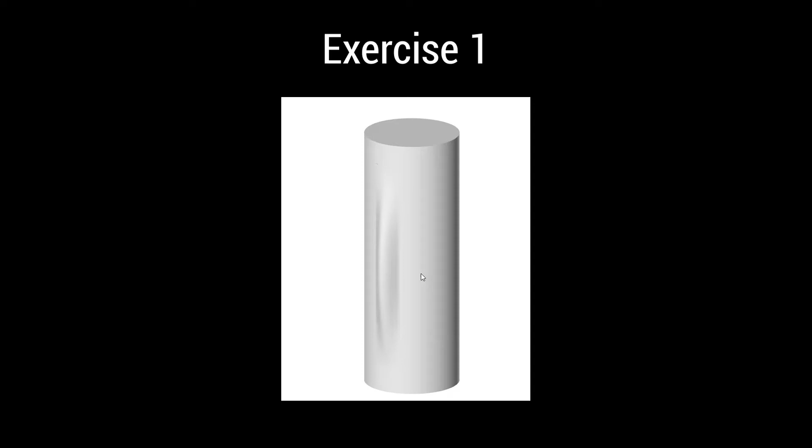So first thing you are going to do is to just create a simple cylinder. You can do it as you want. You can create directly a basic volume. So cylinder, I start from the center as usual. I'm going to make it pretty big, like this, and like this.

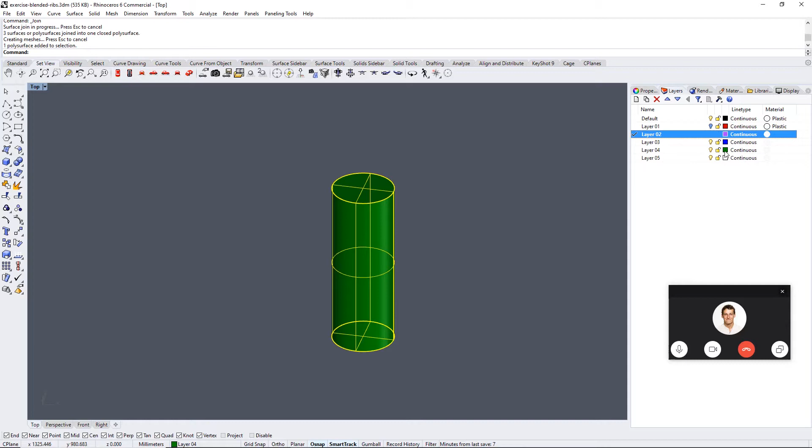Okay, so this one, I'm going to change layer to have different colors. And I'm going just to explode it to transform it from an extrusion to a polysurface and join it again. It's not a nice color, this one. Okay.

Okay, so to do the first shape, I'm just going to first project a line from the center, totally vertical, and project this onto my cylinder by using the Project Curves tool. So like this, now you see that my vertical line was projected all around my cylinder, so also on the top and behind. So we just need the line that is on the front.

So we are going to explode this rectangle and select the first edge that we want to keep by pressing Control or Command and click. Okay, and like this, I have just the three behind selected, and I can delete them with the delete key.

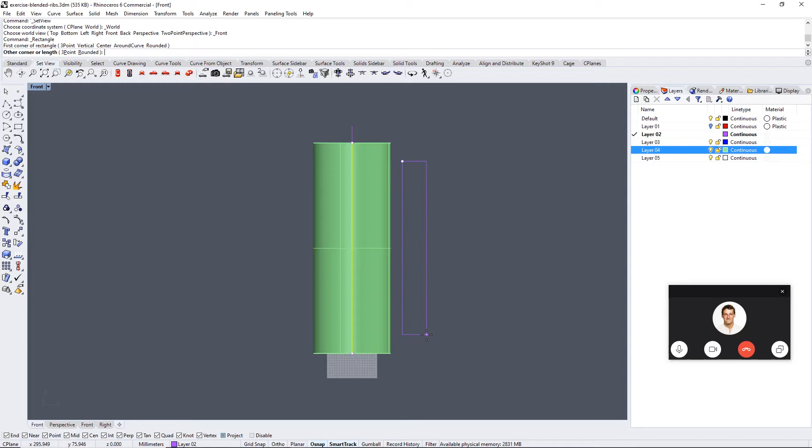So I have this one. I don't forget to click on Project to draw a rectangle, which is going to be the cut I'm going to make inside the cylinder. So something like this. Okay, so I'm just switching in wireframe render to be able to place it in the middle of the vertical line.

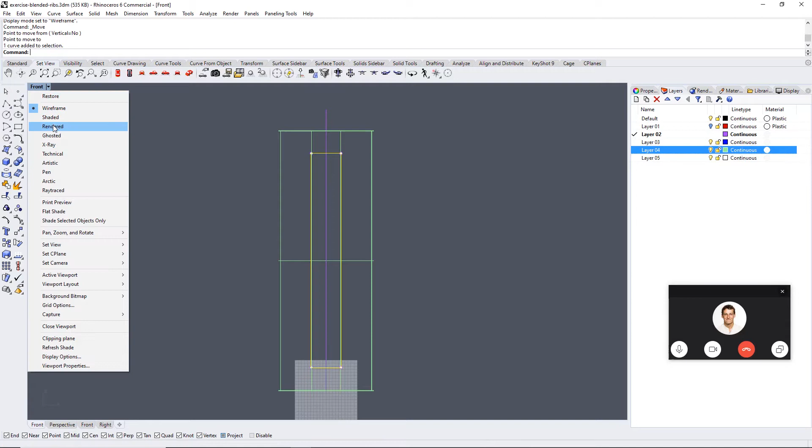Okay, and same thing, I'm going to project this rectangle on the cylinder. So I use again Project Curves, and like this I have two rectangles, one in the front, one behind. We don't need the one behind, so I unselect the one in the front and delete the one behind. Okay.

So we can do the cut right now. I'm going to cut my cylinder with the rectangle I projected on it. If the curve is already on the surface, you can cut something in a perspective view. But if it's not on the surface, if I wanted to cut it with the rectangle which was in the middle, don't forget that you have to be in a plan view for Rhino to be able to understand in which direction it has to cut your surface.

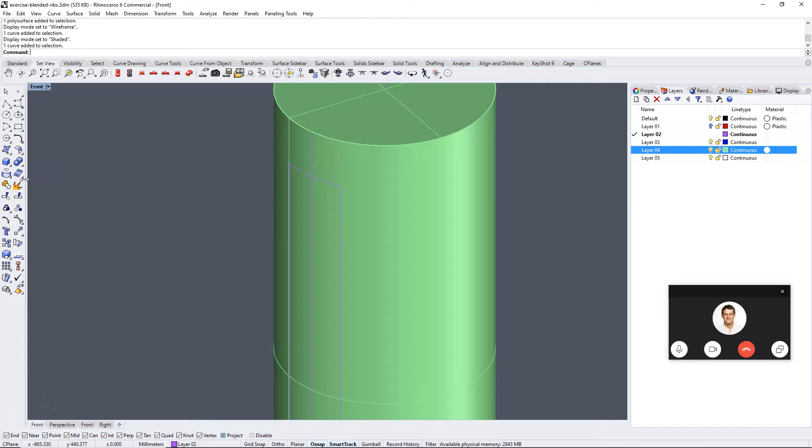But here, I know that this rectangle is projected on the cylinder, so I can cut it even in a perspective view because it knows where the rectangle is. So I use the Split tool, I select the cylinder, I validate, and the rectangle, I validate. So we have this little surface that we don't need anymore. So I delete just the surface.

I remind you that you can undo a cut if you made a mistake by using the Untrim tool. On the Trim tool, you see that with the left click, this is Trim. With the right click, this is Untrim. So I do a right click, I select the cut edge, and you go back to your original surface. Okay, so I undo that, Control Z or Command Z.

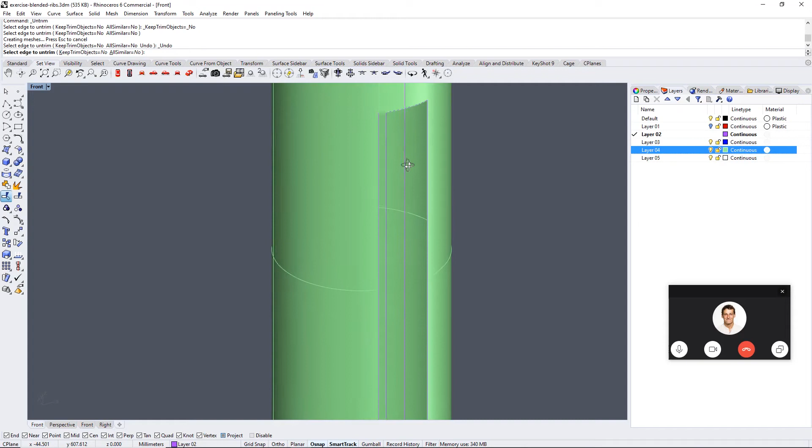And now I want just the beginning of this line and the end of this line, and that it stops at the beginning of my cut. Like this, I'm going to sketch a new curve, but it has to be tangent at the beginning and tangent at the end for the new surface to be totally blended in the existing surface. So I'm going to cut my vertical line that I projected on the cylinder with the rectangle I projected also on the cylinder.

So my line is selected. I use the Split tool. What is the cutting object? It's my rectangle, and I validate. And like this, now you see that my line is cut. I can delete this one. Next step is to sketch my new line between these two pieces.

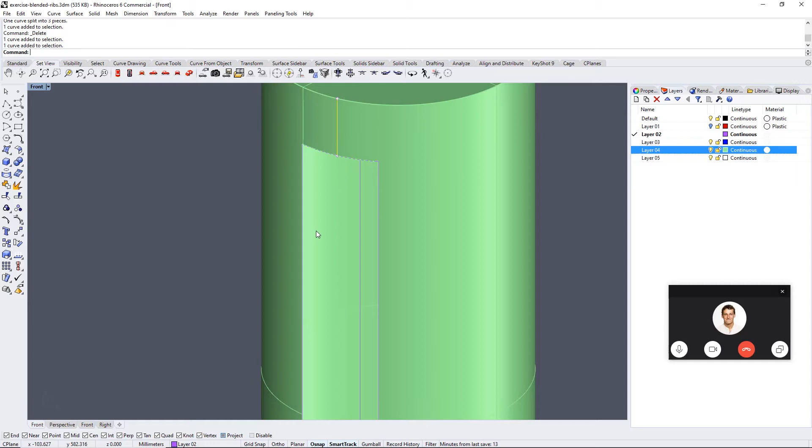So why do I keep these two pieces? For two things. Like this, I know where my curve has to start. And since I know it's totally vertical, I'm going to be able to make a tangent curve. So it will start in tangency with this little piece of curve, and it will end also in tangency with this little piece of curve. Like this, we are sure that our new surface will be totally blended.

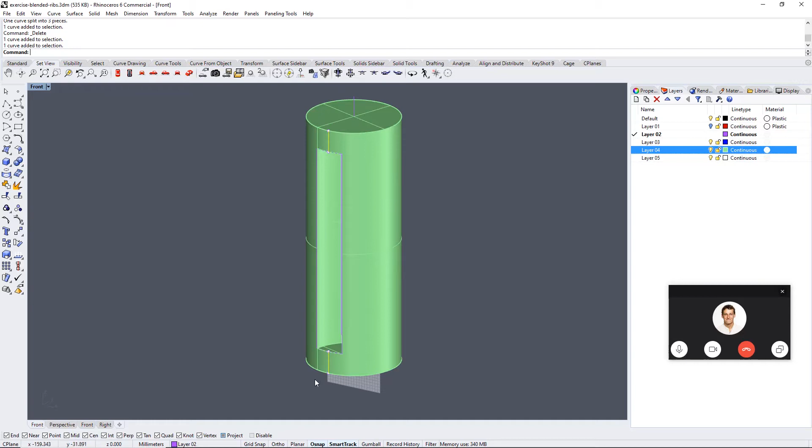So I'm just going to keep these two little pieces in view. So I go in Visibility and Isolate Object. Like that, I have just my two little pieces. Set view in profile view or front view. Profile view. And I'm going to sketch a new line. So I'm just going to use the Control Point Curve.

So of course you use the tool you want, but you have to make something tangent at the start and at the end. Don't forget that if you want to have something totally blended. How do you make something tangent with the control point curve?

For example, I start in the middle. You see that if I click one point and then click another point on top, the start of my line, compared to a virtual horizontal line, if I sketch a horizontal line, there is no tangency.

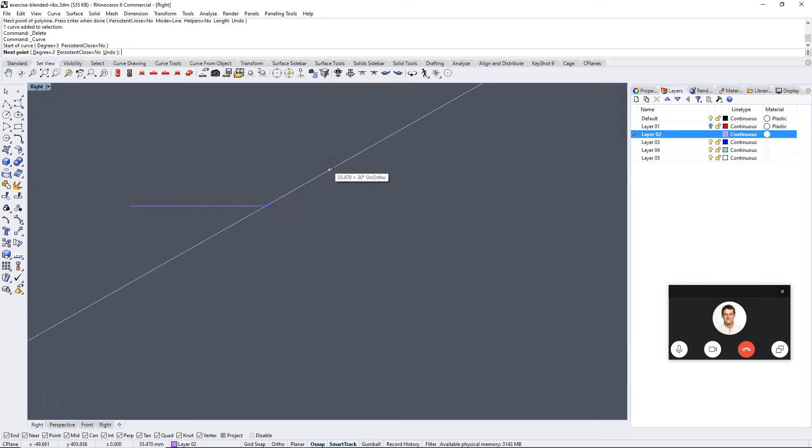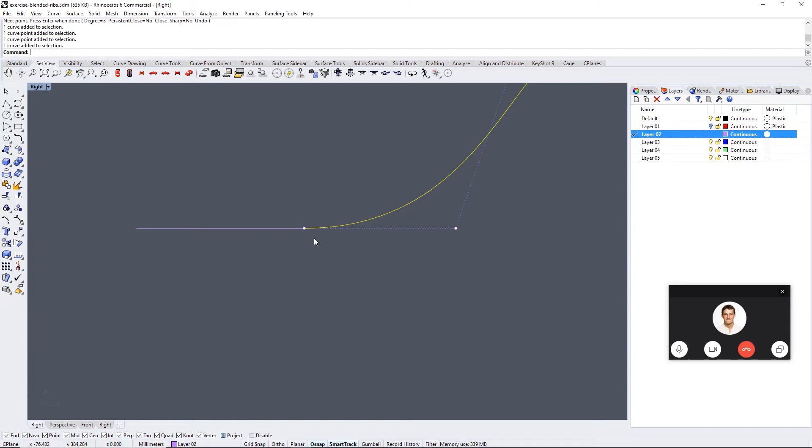How to have tangency with a curve like this? So I start again the control point curve right here. You have to have at least 2 points horizontal, and when you continue your curve and end it, knowing these 2 points are in the continuity of your existing line, will assure you tangency at the beginning of your curve.

Okay, so always at least 2 points for your curve. So that's what we are going to do with our two little pieces right here.

So I start my curve, right here. So at least 1 point vertically to be sure that my curve will be tangent to the existing line, at least 1 point, and then you can sketch whatever you want. So I do something like this, and I go back to something.

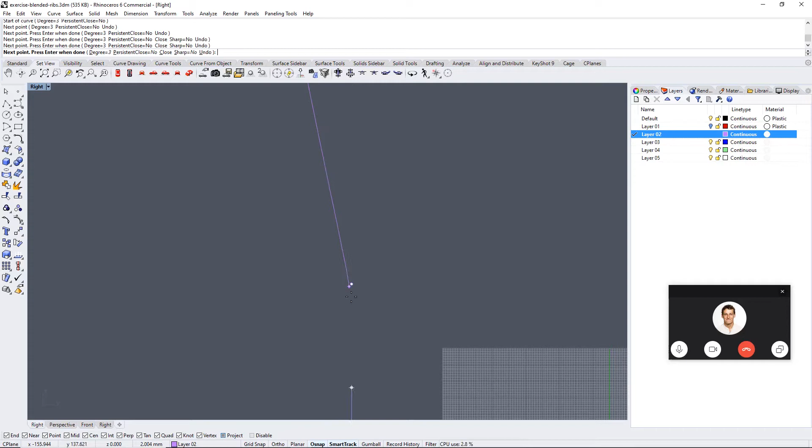So 2 points, at least 1 point in the continuity of my end of curve, and the last point here. And here I know that it's tangent. Then you can move these points if you are not sure, but don't forget that if you move this one, you lose the tangency.

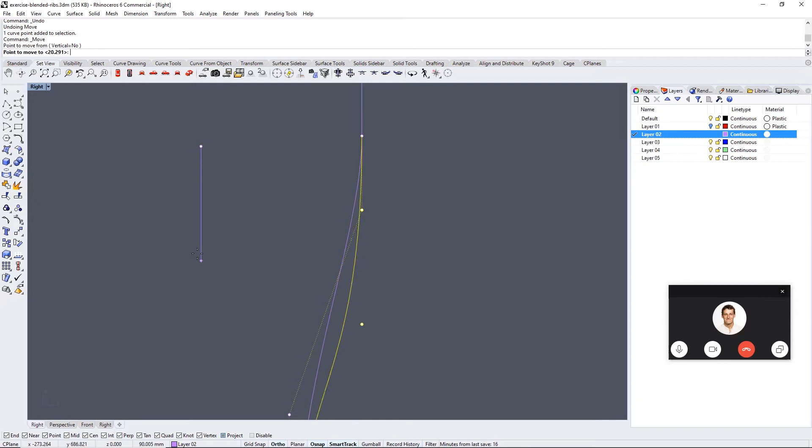You really have to have at least 2 points in the continuity of your existing line. Of course, you can still move it vertically, you won't lose the tangency as long as they are aligned with the existing line. So something like this, just going to move them a bit more like this.

So I remind you that if the control points are not activated when you select the curve, you have to activate them by clicking on the tool Show Object Control Point. And if you want to deactivate them, you right-click on the same tool.

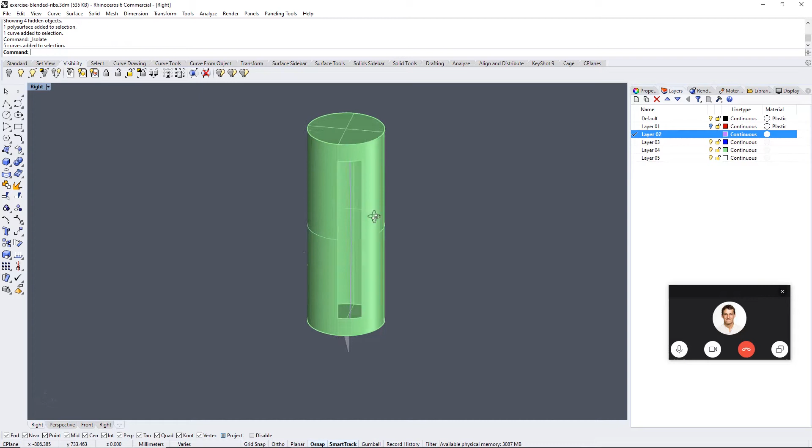So for visibility, I show everything, and we have everything we need. So we are just going to need the cylinder and the curve. I just isolate this object to keep just this, and we are going to use the edges as curves to create our surface.

And for this, we are going to use the sweep 2 rails. So I go in the surface sidebar and use the sweep 2 rails.

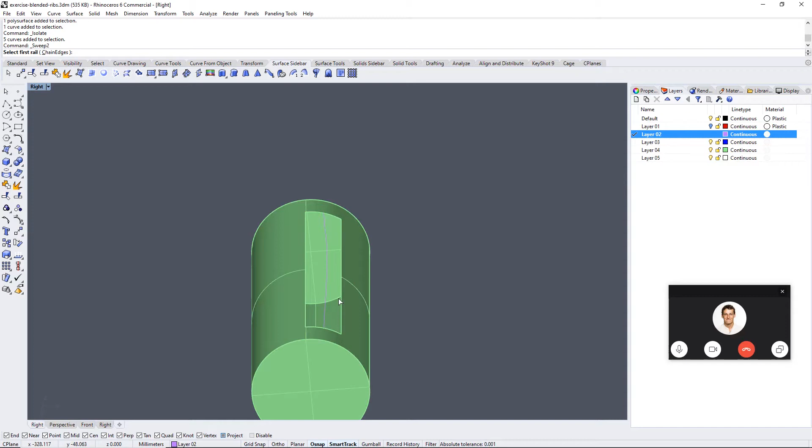So I remind you also that you can choose the kind of junction between the existing surface and the one you are creating just with the rail position. So you will be able to set that you want tangency in the rail position. It's not... you still will have some tangency on the section because it's an edge from the cylinder.

So normally there is no... I'm searching my words. If you choose the rail with the little section or the rail with the long section, I think in this case there won't be any difference. We can try both to see if there is a difference.

So auto chain, yes. First rail, it's the little edge. Second rail, I forgot to validate. Validate second rail, this little one. I validate, and then the section: edge of the cut, my new curve, edge of the cut. You validate, and you have a preview of it.

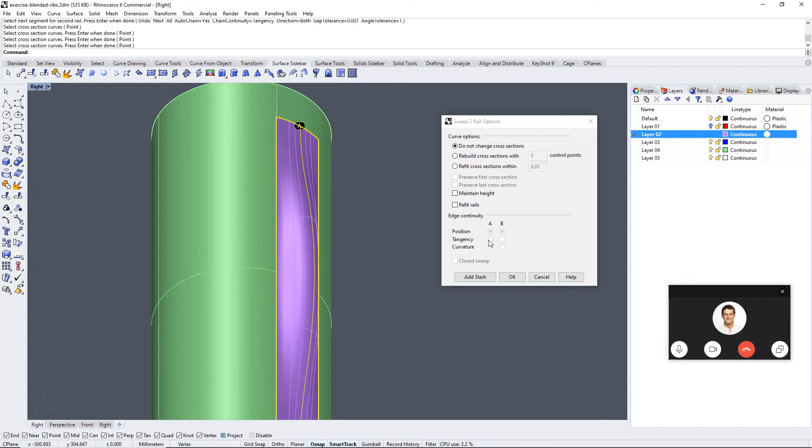And that's pretty nice. I don't know why we can't choose this. Well, I click on OK to validate.

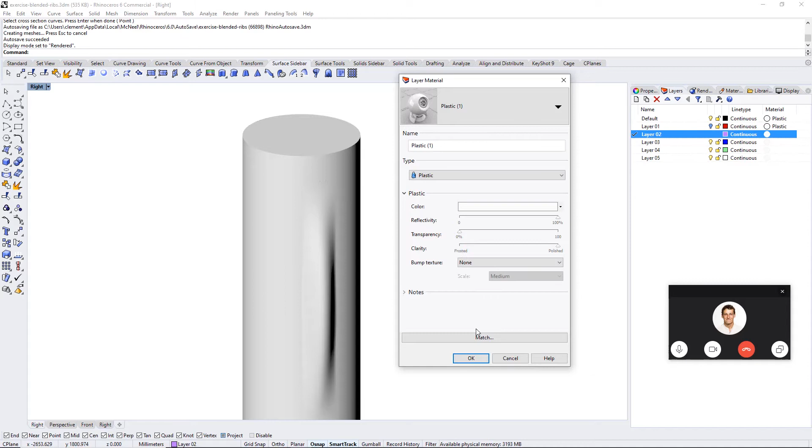And if I go into the render preview, I have to add some kind of plastic material with some reflectivity at 100%. Like this, I have some reflection, and you see that we have, and also for this one, change object layer, and you see that we have a totally blended surface, no edge at all.

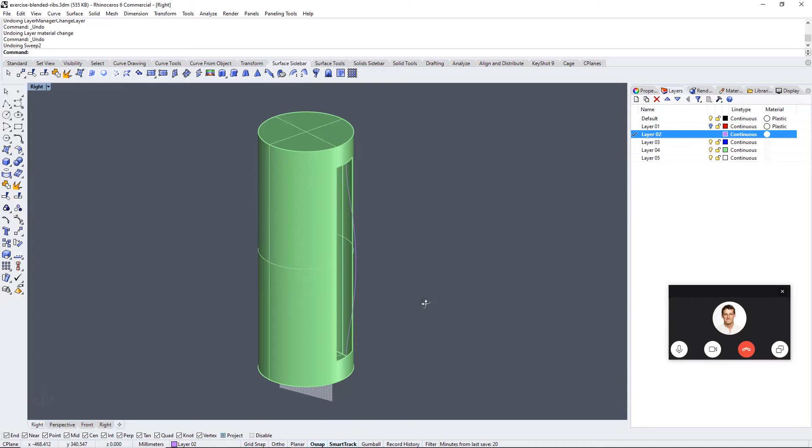Okay, one little trick before I let you do this one. So I go back in the shaded view, I undo this. Remember that you have a little history record in Rhino. So if you are not sure of this curve, instead of changing the curve and redoing again the shape of the surface, the Sweep 2 Rails, you can record the history.

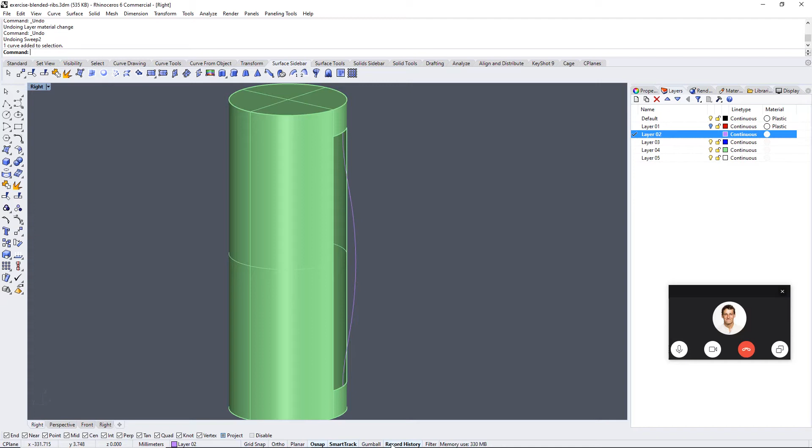Okay, so the tool is at the very bottom of your screen, record history, just near the magnet tool. You click on Record History. Now it's in bold font, so it's recording the history. You go to pick your Sweep 2 Rails, chain edges, okay. First rail, you validate. Second rail, you validate. Section first edge, curve, second edge. You validate, and you click on OK.

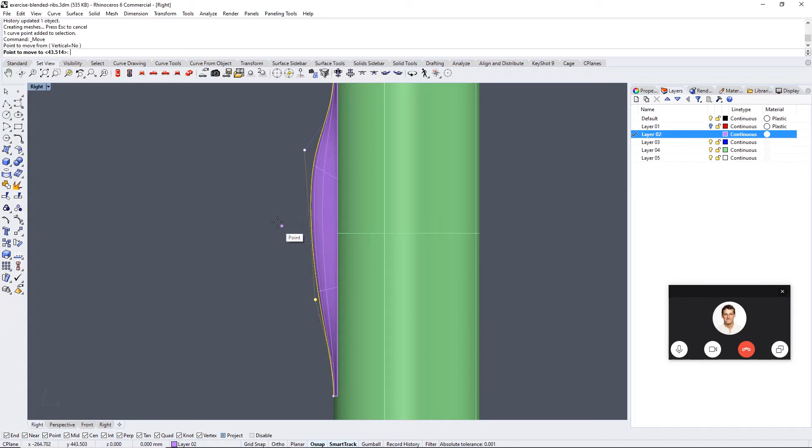Now you see that the record history is unactivated, but I still have my curve here. So I go in the side view, and if I move some point of my curve, you see that the surface is moving too, because Rhino recorded the last function. So like this, you can still make some changes in your curve without doing again your Sweep 2 Rails.

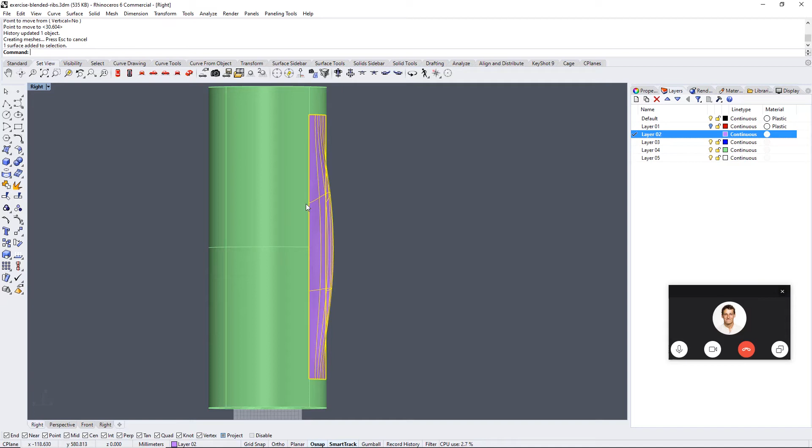But as soon as you are going to create a new function, a new command with this surface, for example, now I want to join these two surfaces. You see that it's not in the same layer, so I join them. I have the little warning saying that the join command will break the history of the two objects. Are you sure you want to do that? Okay, so I said yes.

So now if I change the curve, it won't change anymore my surface. Okay, I let you do that.

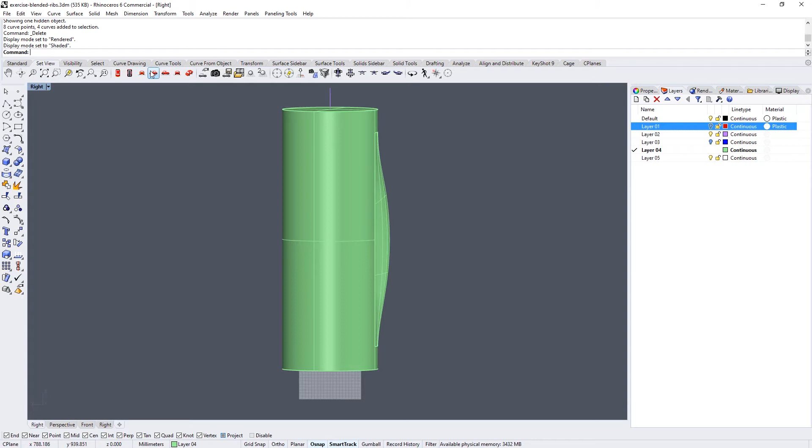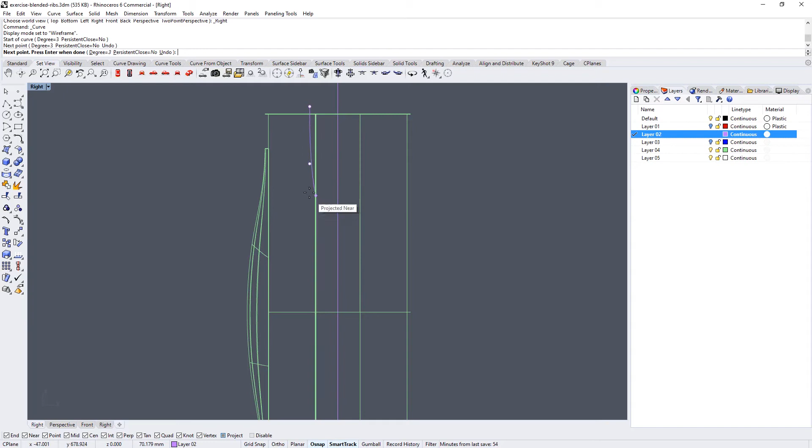And I'm going to sketch my line. So I go in side view. I'm still going to use the control point curve. I prefer to go in wireframe. Okay, and like this. Okay, so I sketch a line. So here I want really the start to be totally a straight line.

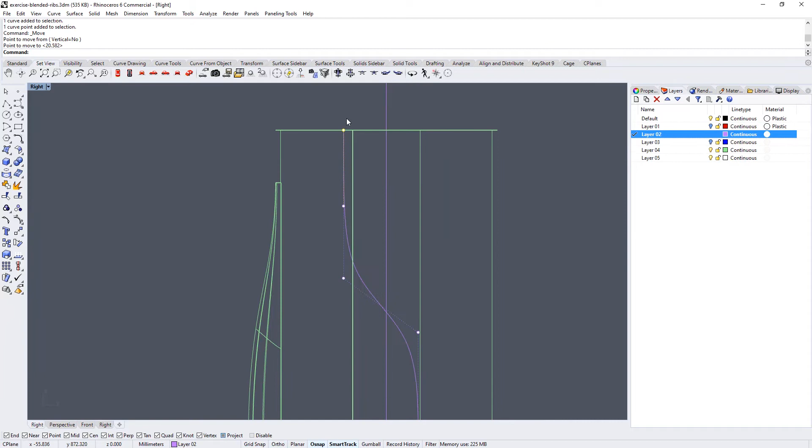So I'm going to create 3 vertical points. Then like this. 1, 2, 3, and another 1, 2, 3. Okay, so I have this kind of line. So you are not obliged to do exactly the same shape. Okay, you do the shape you want. It's nice to start from a totally vertical line like this.

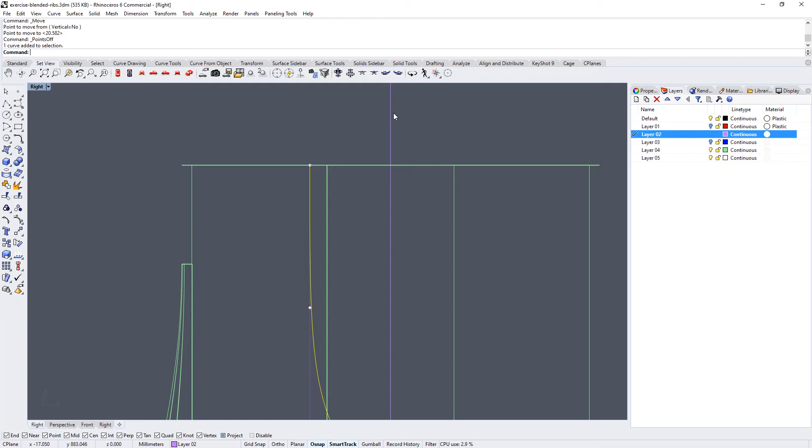When you do the offset, it will start also at the very top of the cylinder. Otherwise, if the start is not totally vertical, you will see that the offset is going a bit out of the cylinder, which is not bad, but for the example, I prefer it to be totally vertical.

So I go in the curve tool, choose the offset curve, and create my offset. So maybe it's not enough big. I'm going to click on through points because here it's waiting a distance, but you can click on through points, and like this, it's where you click that it will do the offset. So something like this. Okay, something like this. So now I have my 2 lines.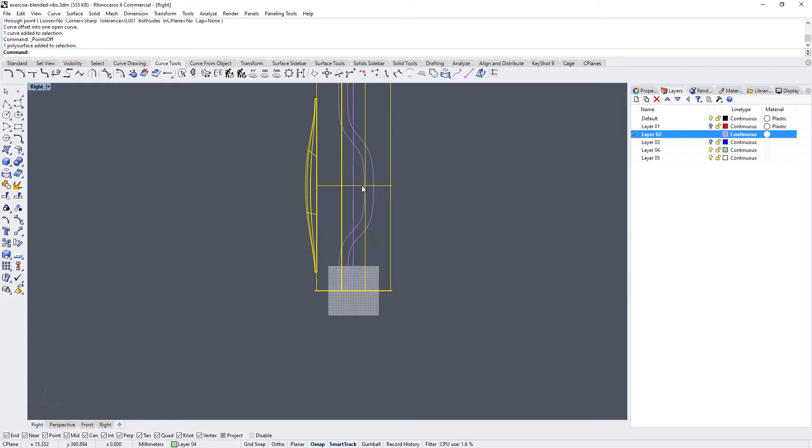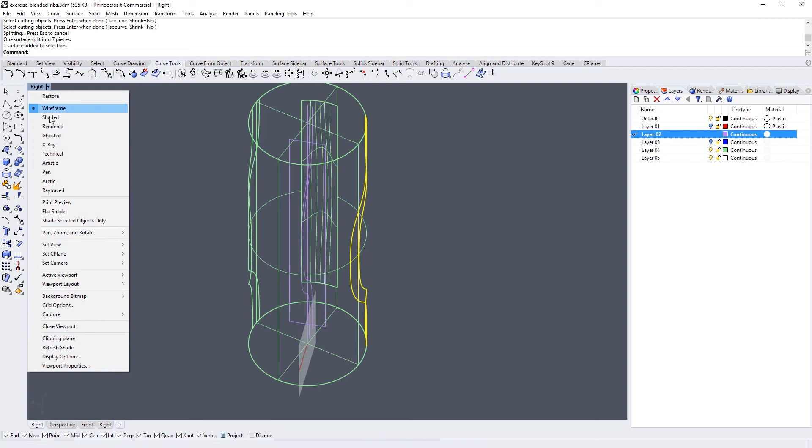So I'm going to cut my cylinder. So first I explode it to cut just the side of the cylinder. I choose split, my 2 curves, I validate, and now, so my cylinder, you see it's cut both sides because I was in plan view, so it cut through the surface. So I have these 2 cuts that I can delete.

Okay, and now I'm going to change the shape of a part of the cylinder. So maybe I can use this one. So I'm going to join these two pieces together, otherwise the cage will make a difference between the edges.

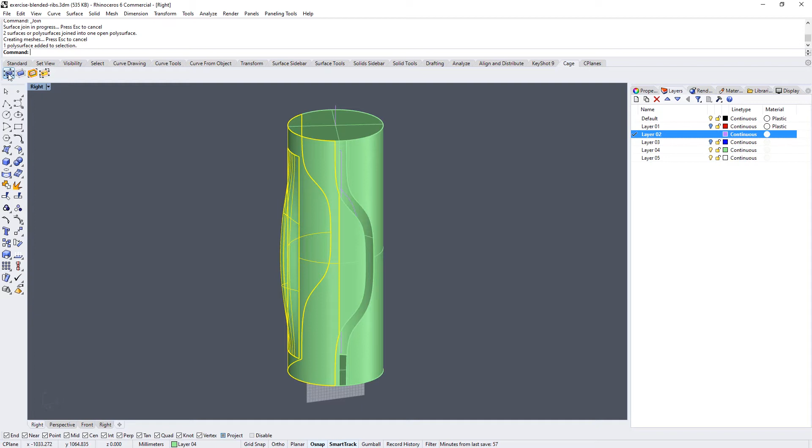And I'm going to create a cage. So cage edit to create a cage automatically around the shape you selected. So cage edit. Then you just have to click on the first options. So bounding box, C-plane, and the important part is the number of points. So here I'm going to create a cage 4x4x6.

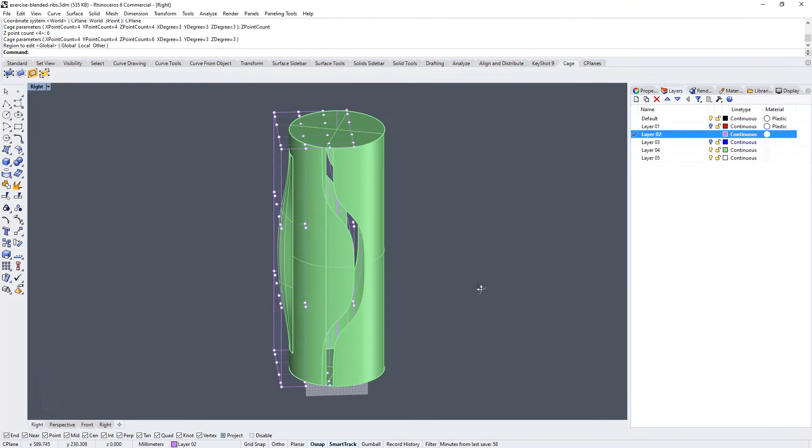Validate. I have to activate the points to see something. Okay. So of course the 6 points are not in the good direction. I want the 6 points in the vertical direction. So I'm going to undo this.

Oops. Bounding box, C-plane, Z point. Yesterday I made 6 points in the Z, it was working. I'm going to make 6 in the Y.

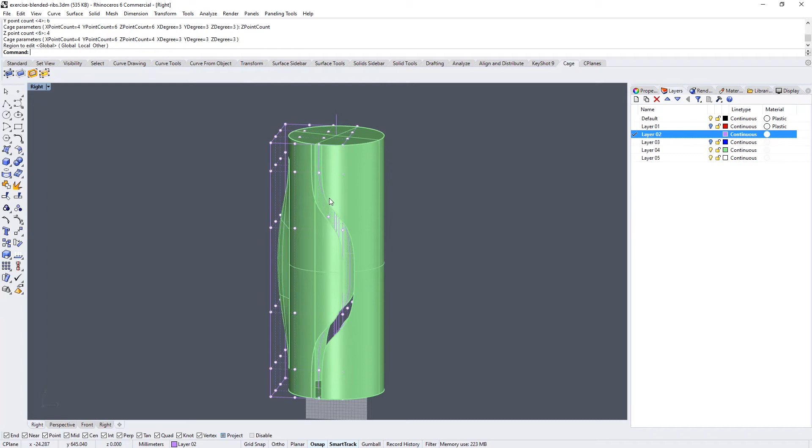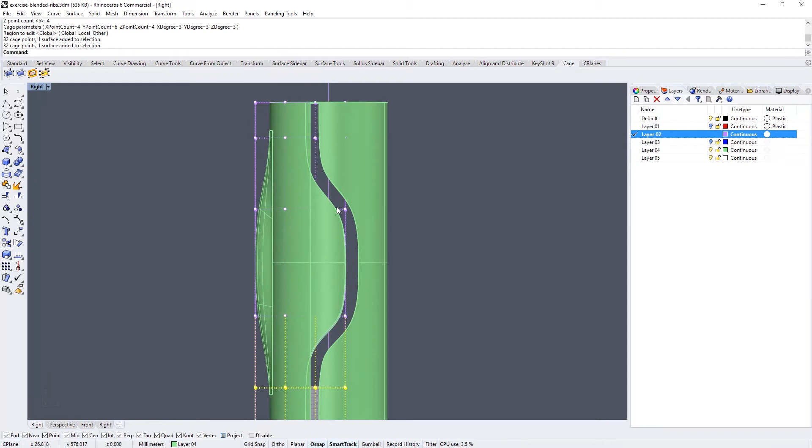Okay, so now I have the 6 points vertically, so I put the 6 points in the Y axis. I want to change the shape, but just in the middle. That's why I put 6 points vertically. I'll keep the two first rows and the two last rows unchanged, so I keep exactly the same shape at the beginning and end of my cylinder. I'm just going to change the shape with the two rows in the middle.

So I select the wireframe view, like this I see better, and side view, and I'm going to change the shape of these points. So you see I select the two rows in the middle and the two columns on the right, these 4 points.

So I select them, then I go into top view and use my scale tool, scale 1D, from the center of my cylinder. I wrote W0, I validate. Endpoint, we don't really care here because we're not working with exact measurement. So I click just a bit outside of the cylinder and go vertically or horizontally on the side, something like this, it's enough.

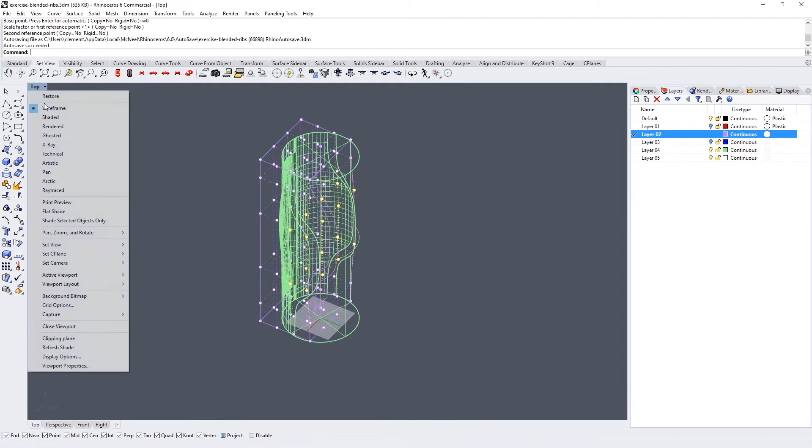I think I forgot a piece, so be careful that everything is well joined. You see here I had a piece after my cut that was unattached to the rest of the surface, so I joined them. Here I have 2 little pieces that I don't need, so I can delete them.

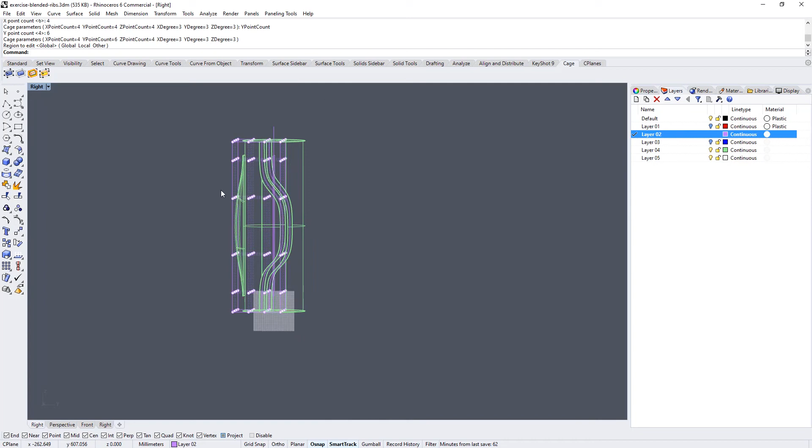Okay, I have the 6 points vertically. So set view, side view, I select the 4 points here on the side. I go in the top view and do a one direction scale from W0, and I stretch it a bit on the sides.

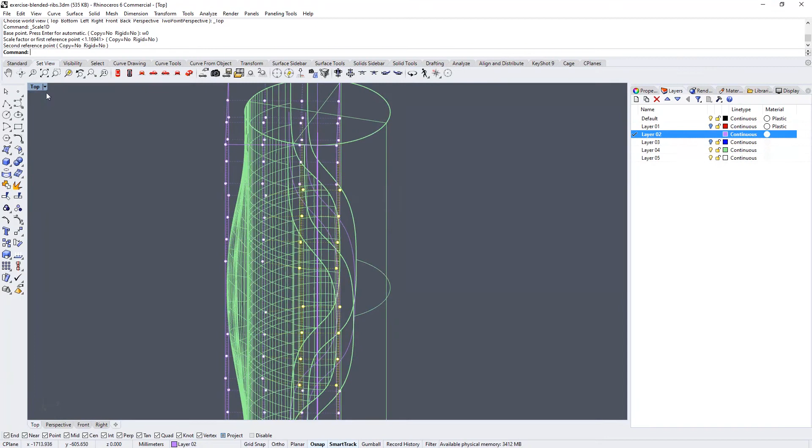Okay, so I go back in the shaded view. The cage, I don't really need it anymore. And now I can make the blend surface between the two halves of my cylinder.

So I go in Surface Tools, Blend Surface. Before clicking anywhere, don't forget to click on Chain Edges, Auto Chain yes, Continuity on Tangency. First edge, you validate. Second edge, you validate. And here is your blended surface.

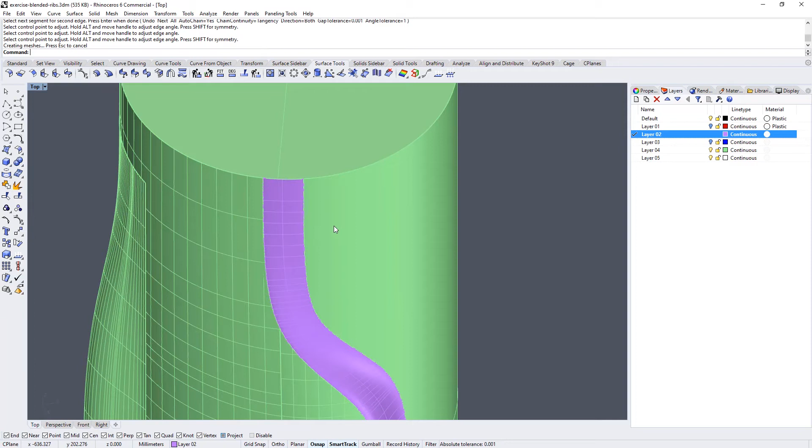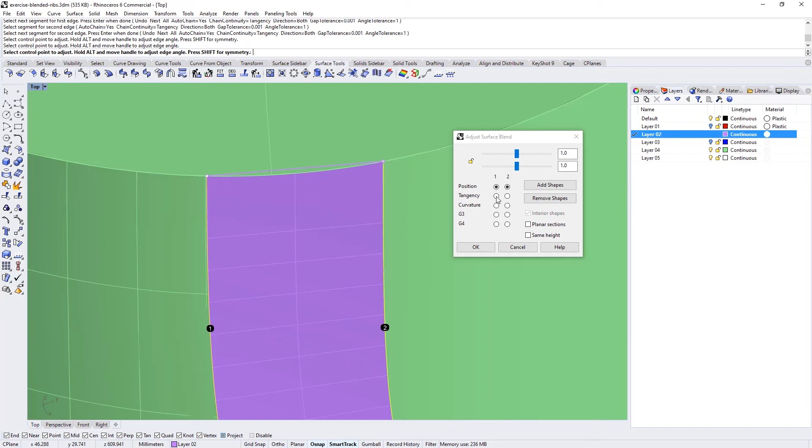So here you see I'm in curvature mode. Maybe it's not useful here, so just tangency will be enough. If you want straight, sharp edges, you can choose some position. Like this you will have really sharp edges, but at the top you will lose the curve of the cylinder. So here, tangency.

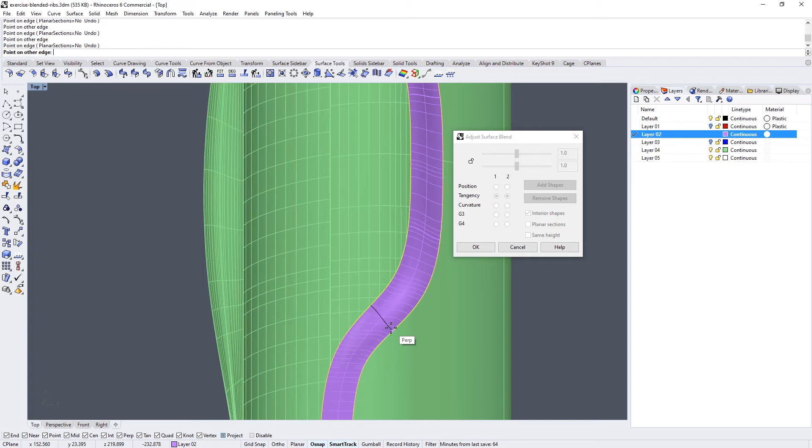Okay, what I can do is add some shapes. For example, here, try to always look at the perpendicular magnet, you click on it. So I'm going to add a few more like this to have a cleaner surface. Perpendicular, perp, and perp.

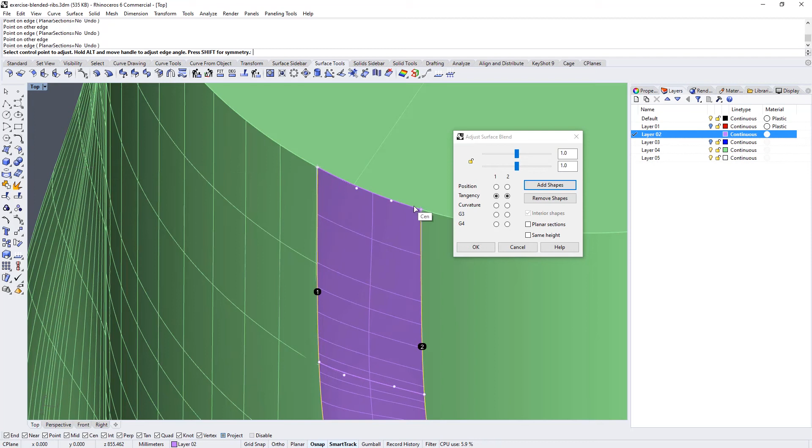When you're finished adding your shapes, you validate, and now you can manually change the degree of tangency on each handle. So here you cannot move it like this, it has a curve which is really similar to the side of the circle. But the other one, you can move them if you want a more sharp edge in your blending surface.

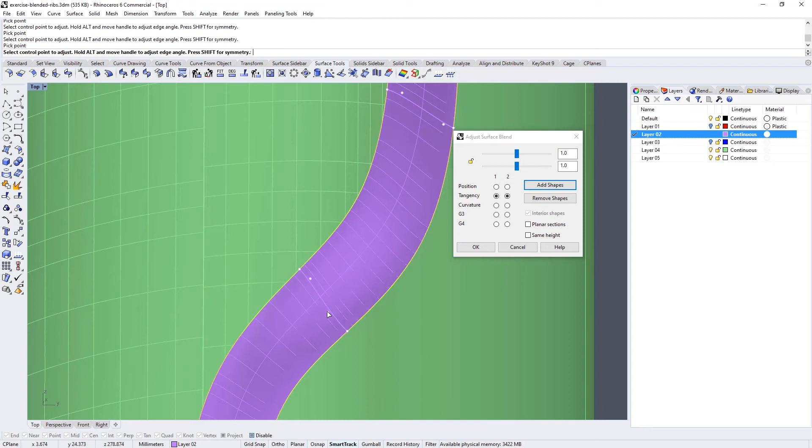When you do that, maybe disable all the magnet points, because otherwise it will magnet everywhere and it's disturbing what you're doing. Okay, so you can just change the little handle, and you just have to validate at the end.

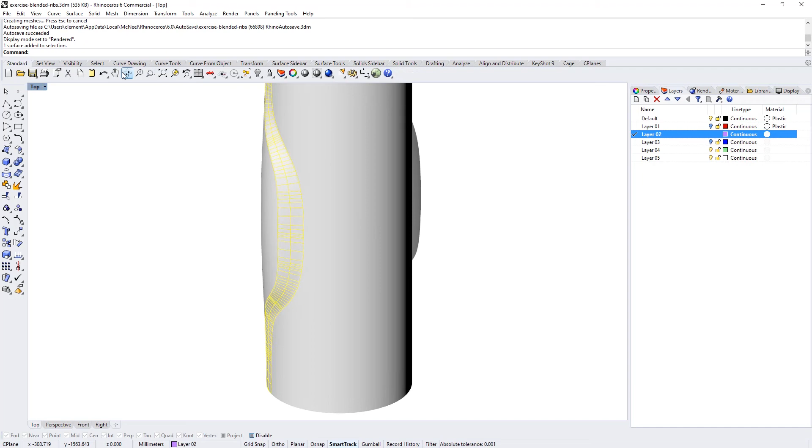And if I go in render view, I have something like this, which is totally blended. And if you worked well in symmetry with the cage and with your cuts, if you go in top view and create mirror with the mirror tool from the center of your scene, you don't have to make a second one, because the first one will fit perfectly on the other side. So then you can join everything.

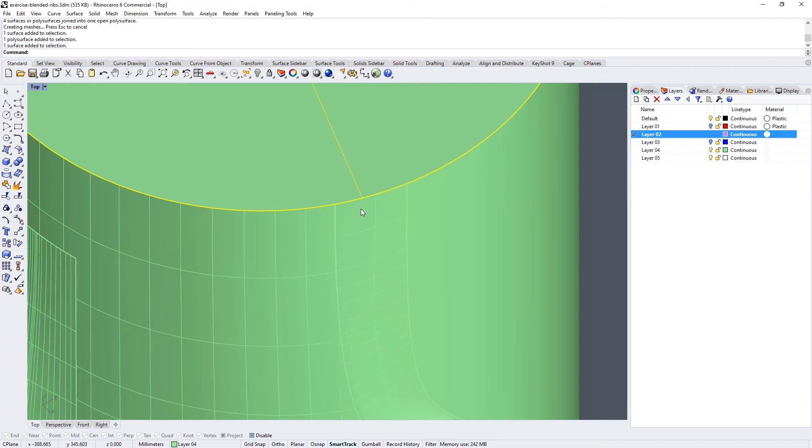Okay. The only thing is, I think this edge won't fit perfectly onto your cylinder. So in general, what I do is the blend surface, and then I just cut like this.

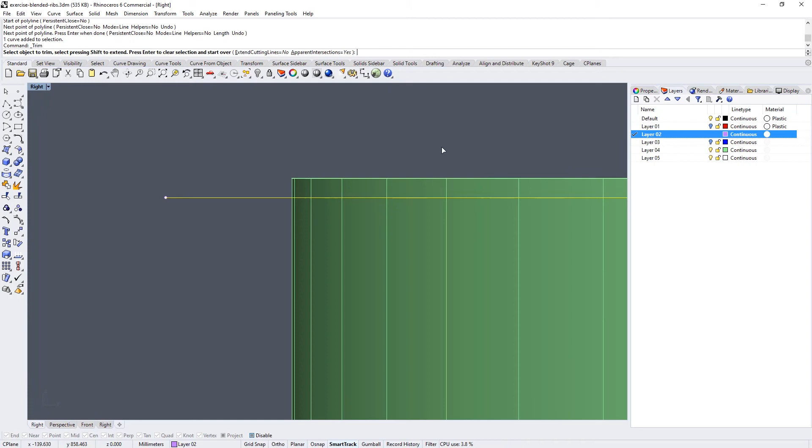So I go in this view, I create a sideline, you cut all the part that you don't need, and you redo the cap. Like this, you know that it's perfectly fitting and blended.

And you go into the tools you know, solid tools, cap planar holes, and there is a new cap on the top. You do the same at the bottom, because otherwise I think the edge of your blending surface and the cap of the cylinder won't join perfectly. Okay, your turn.

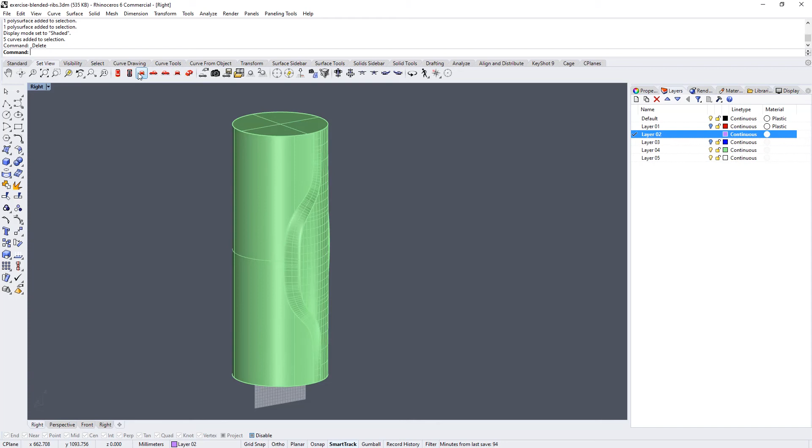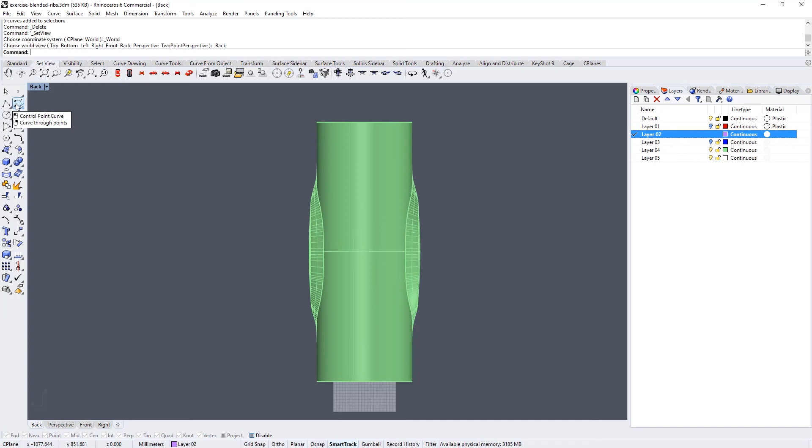So set view, back view. Okay, so here it's the same start. We are going to sketch one curve through our cylinder, and we are going to create an offset of it. So same tool, control point curve. So I'm just going into wireframe to see better through my cylinder. So I unchecked visible because I checked it a bit earlier.

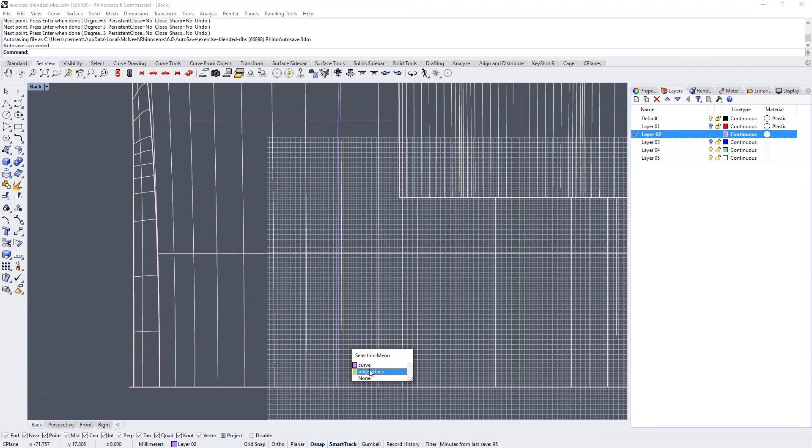So 1, 2, 3 points. Okay, and then I'm just going to create this line. This 1, 2, and 3. Okay, so I have my line. I'm going to create the offset curve. Okay, something like this.

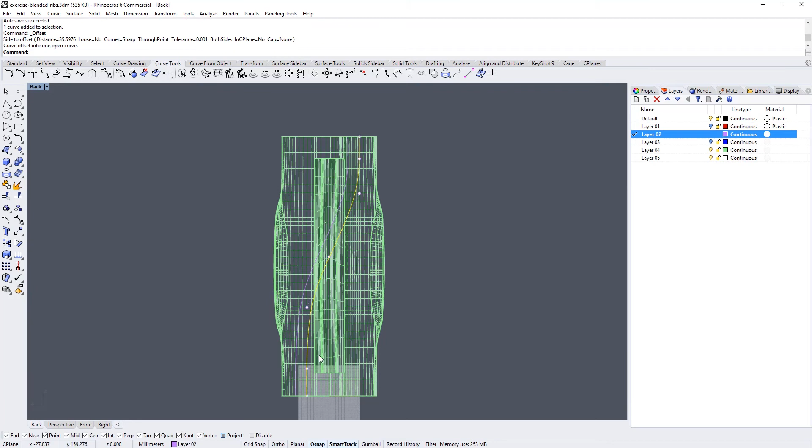Wait, I'm thinking about something. Did I create 2 offsets or just 1? No, I think it was just like this. Yeah, just 1. Okay, so I have my 2 offsets, and I'm going to do the same thing as earlier.

So this time I'm going to project them on my surface because I just want to cut one side. If I cut in plan view, I will cut behind and in the front too. So here I'm going to project the 2 curves on my surface. So of course I have 2 projections. So I'm going to unselect the one I don't want.

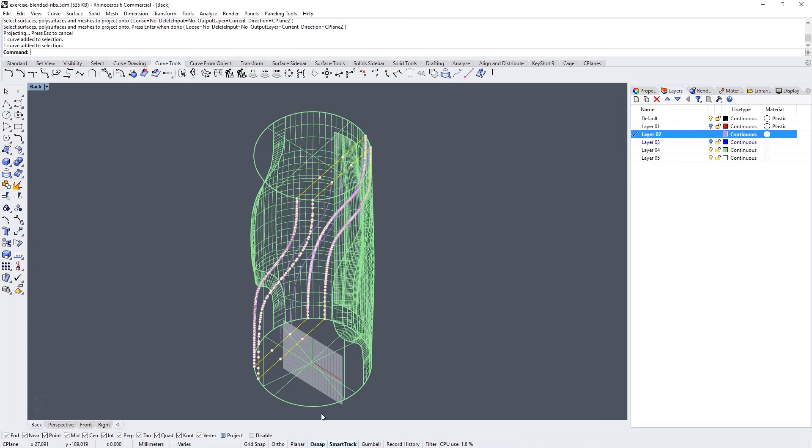Excuse me, is it just me, but I can see your screen moving? You can? Yeah, I think it's freezing. Maybe it's the connection here. Okay. Wait a bit. Tell me if it's better in a few minutes. Okay.

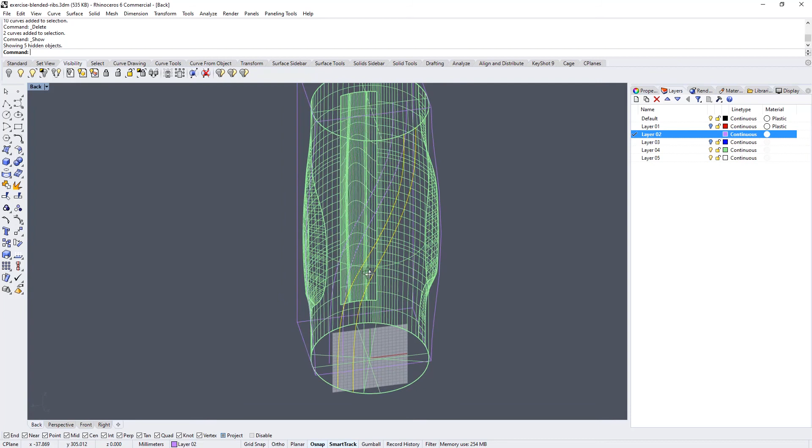So for now, I did exactly the same thing as in the previous exercise. I created one curve from the top of the cylinder to the bottom, and I created an offset. I cut my cylinder with these 2 curves. So I select my cylinder, I use the split tool, I select my 2 curves, and it's not working. Ah, yeah, maybe it's because I have to explode first. So think about exploding your cylinder, otherwise it won't work.

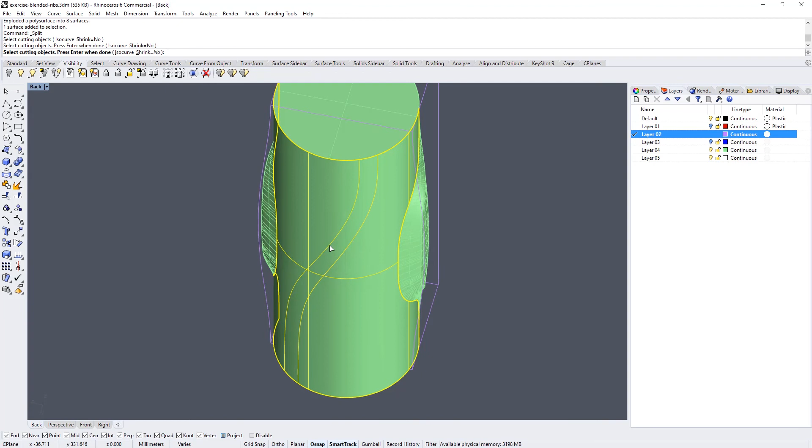So you select just the surface you want to split. You use the split tool and your 2 curves. And this time it's working. And I'm going to delete the part in the middle. So to do our surface, we will use the sweep 2 rails like in the first exercise.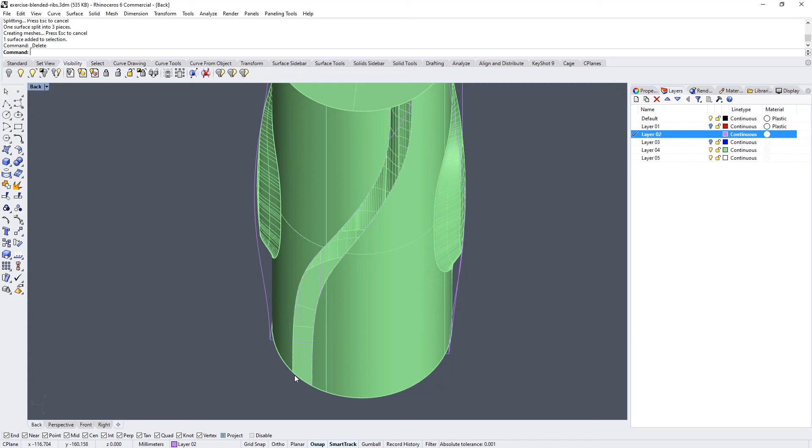So what we are missing is the little piece right here, because it's the edge of the whole disk, but we just want the little piece that we will need to make the rail. In the first exercise we cut with a rectangle, so we already had the edge, but here we don't have this little piece of edge. So we are going to need it, and we are going to create the edge here with the sharp angle.

So to do that, we are going to duplicate an edge. Duplicate edge is when you transform an edge from a surface into a curve. So we go in the curve from object tab, for those who have the tab, and we use the tool called duplicate edge. You select the edge you want to duplicate.

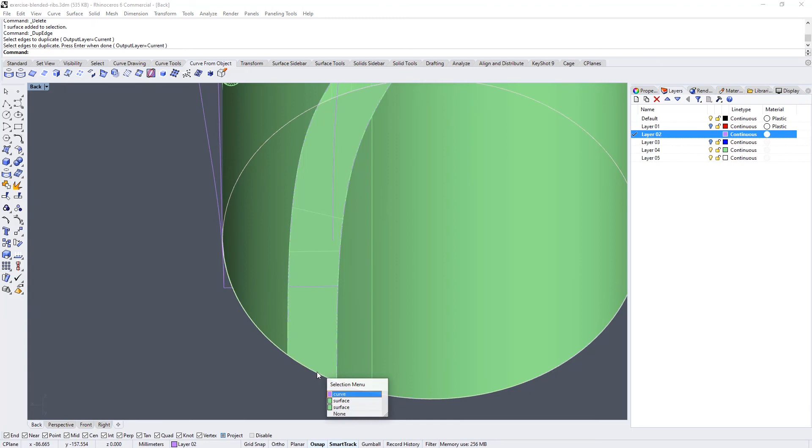Okay, so I use my circle. What is this edge? Why do I have 2 edges? Well, I'm going to try with this one. Okay, so now I have my curve here. And if I just show my curves, I just created this edge, and I want just the piece in the middle, so I'm going to cut the whole circle with the two curves I projected on my cylinder.

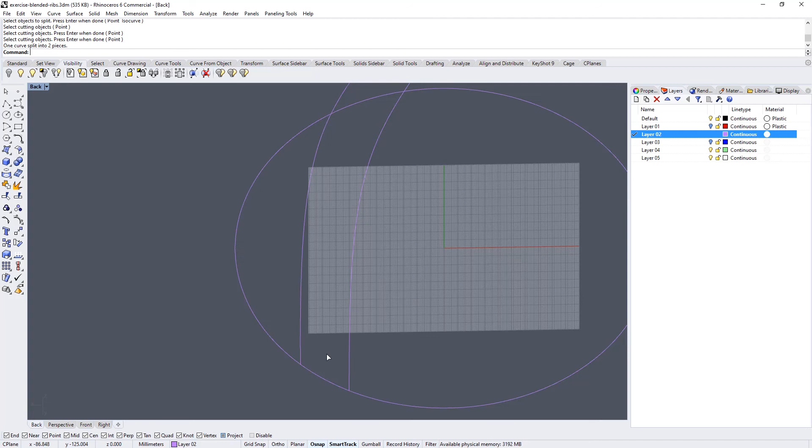So I use the split tool for that, I select the circle and the cutting objects, and I have just this little piece. All the rest of the circle I can delete. So I have this, and now I just miss the piece at the top.

But we can't sketch it like this. Otherwise, if we don't sketch some lines which are tangent to our top circle, we won't have a nice blended surface. So what we need is the beginning and the end of each edge. So for that, we are going to do the same thing as at the bottom, but we are going to do the contrary. Instead of keeping just the little part in the middle, we are going to delete this little part in the middle and keep the sides. And like this, we will be able to create a tangent line from an extremity to the other.

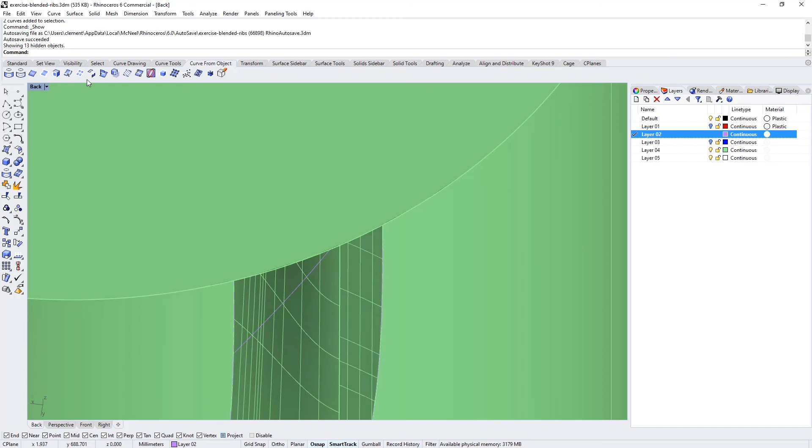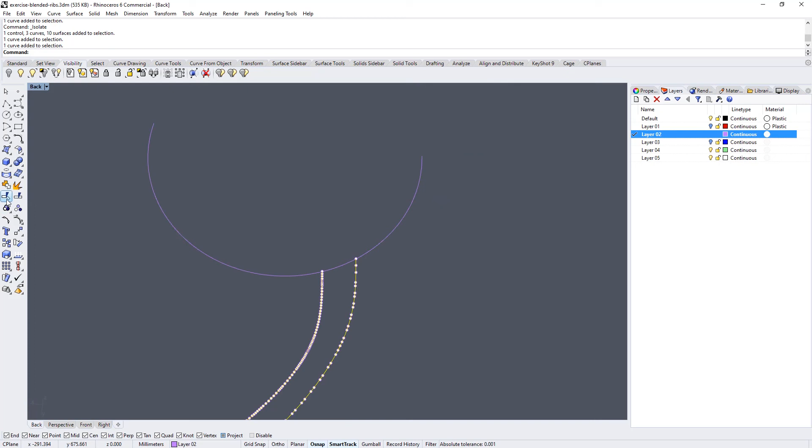So same tool, curve from object, I use the tool duplicate edge, I select my circle, I validate, and then I'm going just to isolate this object so that I see better. So isolate object, okay, and with these two curves I'm going to delete this time the part in the middle. I select the two pieces of circle, I isolate them like this, I see just that, and I go into the top view.

And here, to make it simple, I'm going to show you a new tool, which is in the curve tools. And this tool is extend curve. So be careful, you have a lot of different curve extend. Extend by arc keep radius, extend curve smooth, extend by line. So you see that each of these tools will extend the curve. So this means that you will keep the tangency in each of these cases, but it will create different kinds of curve.

For example, if I select extend by line, and I choose the extremity of the curve, you see that it's just creating a straight line, but it's tangent to the point I started with. There is extend by arc keeping radius. So here, same thing, no choice. It's extending the line, but it's keeping the radius of the line. So here I'm just going to continue the circle. So it's not exactly what we want either.

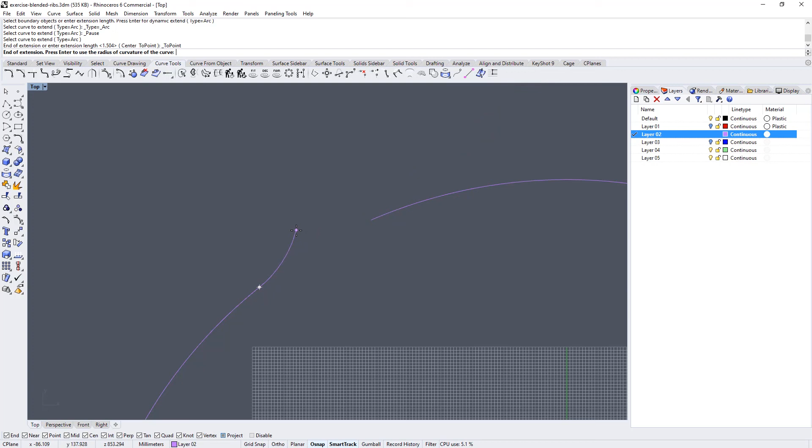The one we are going to use is extend by arc to point. Okay, I don't know if you see well, extend by arc to point. So this means that I start, you see that I have the tangency from the extremity of my line, but the next point is exactly where I want. So what I'm going to do is to create a point around here, and I will do the same through the other point, and I'm going to join them. So for example, right here, I'm going to try just to create a little conic from here.

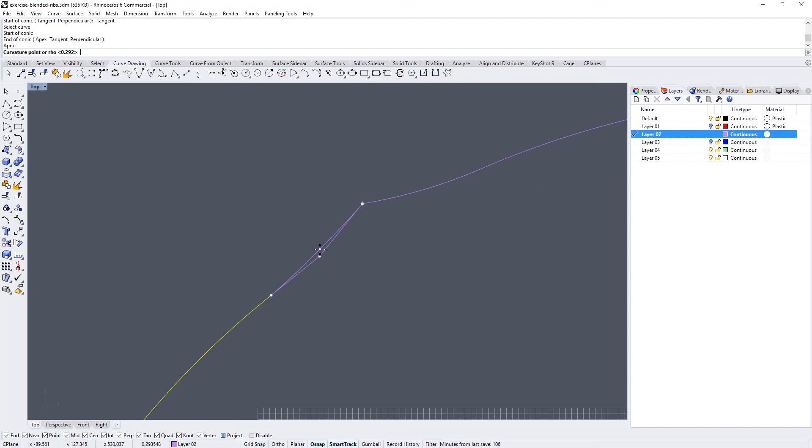Okay, I'm going to do it with a conic, 0.5. Okay, so I did it with a conic tangent. So remember the tool, conic. I created tangent at start and I joined the points I created. I don't know why the...

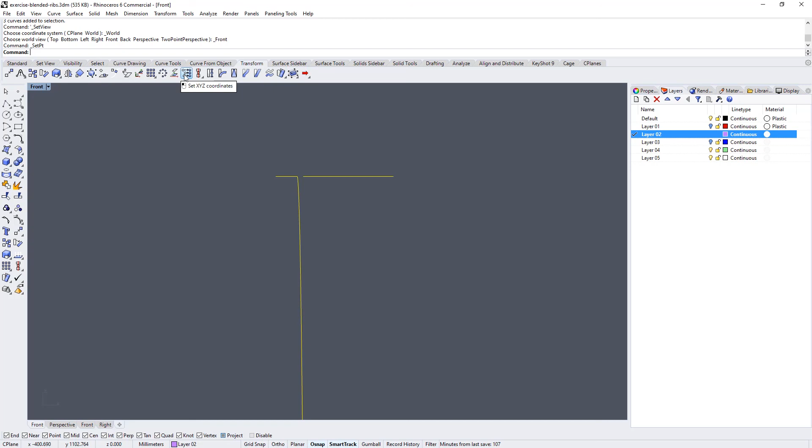I don't know what is happening right now. Transform. So I'll give you a little tip. If you have something like that, a curve which is no longer on a plane, and you want to project it on one plane, you have a tool which is called Set XYZ Coordinates. Okay, it's in the Transform tab, Set XYZ Coordinates. You select your curve, you click on this, you select in which direction you want to project.

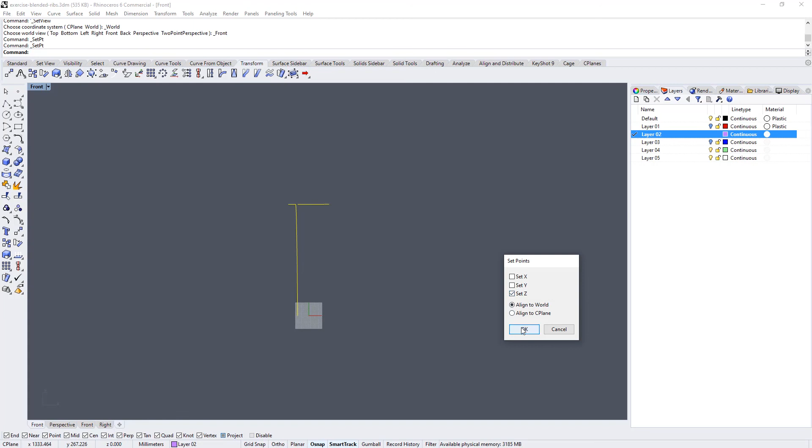So here I want to project everything on the z-axis. So I select just z-axis. I click on OK, and you see that everything is set to the same plane. Okay, so I just lock onto where I was, and now I put everything in the same place. Okay, so it's a nice tool. If you have a line in 3D that you want to put onto a plane, you choose Set XYZ Coordinates. Maybe it's because I have a problem. No, I don't know.

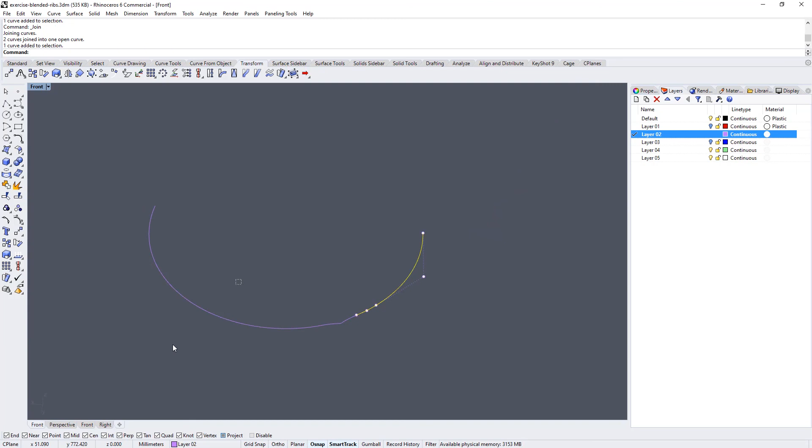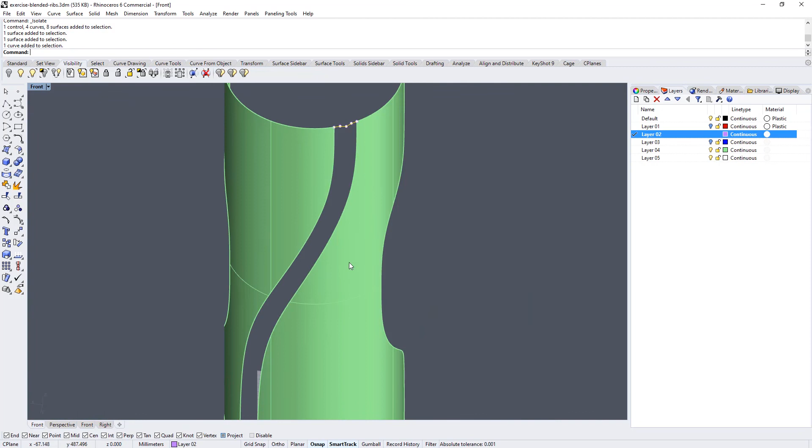So here I have my two little pieces of curve. So I just exploded this one. I just need these two little pieces. I join them. This and this, I don't need anymore. And I show everything again. So now I have everything I want. I have my two little pieces and my surface. So I just keep this. So what I need is my two surfaces, my little piece here, and the little piece here.

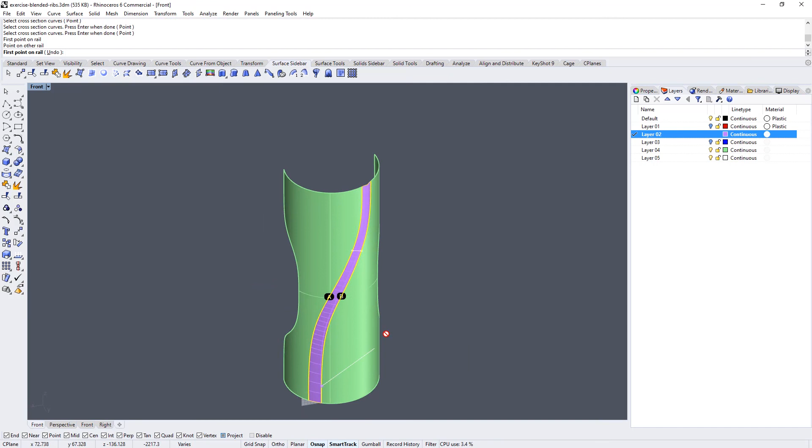And now just sweep two rails, chain edges, auto chain. Okay, so I'm going to use this as rails this time. First rail, okay. Second rail, okay. Section 1, section 2, you validate, and here it is, set on OK. So maybe you have to add some slashes like this to make it a bit better. Okay, and if I go into rendered mode, here is the blended surface.